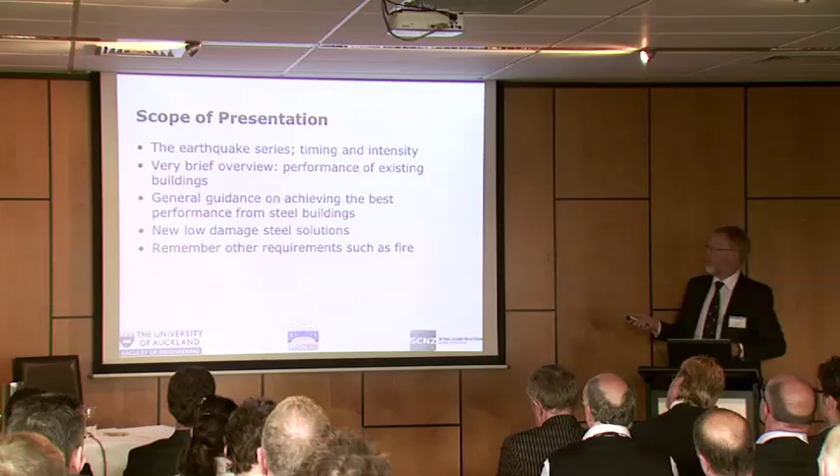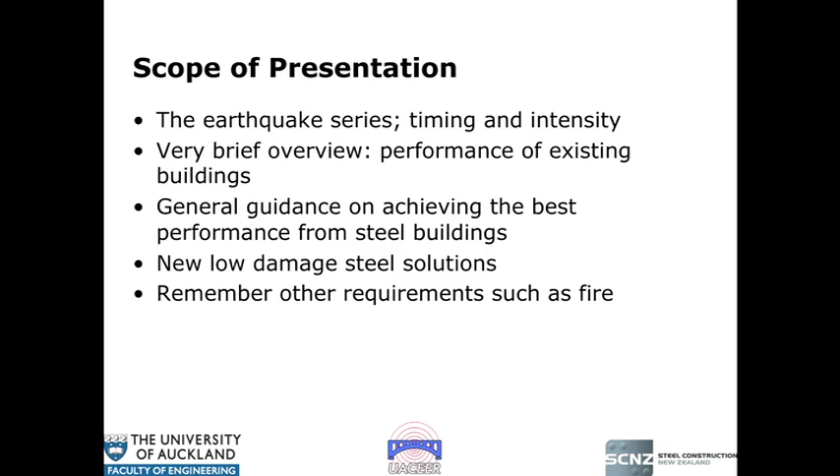So what I'm going to do now is talk about the performance of steel buildings in Christchurch. This will be a very brief overview: how severe the earthquakes were, performance of existing buildings, general guidance on achieving the best performance from steel buildings. This is really for the consultants and the contractors. Some of the work on the new low damage steel solutions, and then just a reminder that when we are talking about new buildings, not to forget that there are 35 areas of the building code which require good performance, and earthquake is only one of them.

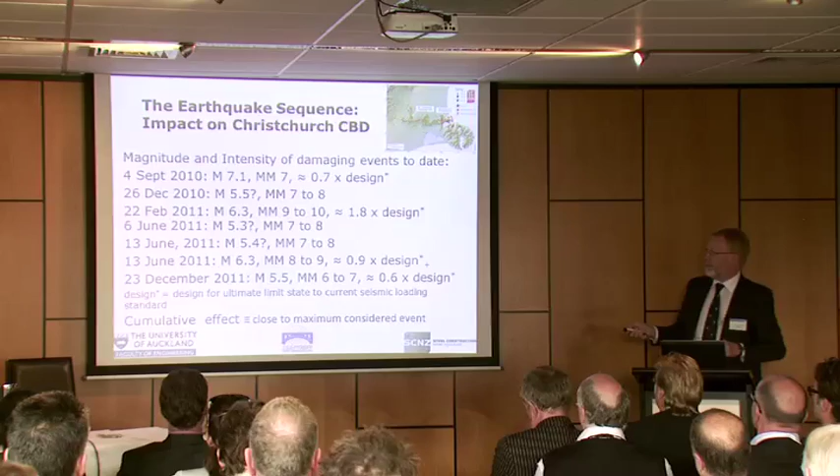Okay, so I've got a lot of pictures and words here, but I'm not going to go over all of them. I just want to reinforce the point that the Minister made: this has been an earthquake series unprecedented for hitting a modern first-world city. The design is what we call a big one, the sort of earthquake everyone feared would hit Wellington first. Well, Christchurch has been hit by basically 7 damaging earthquakes, varying from 0.7 times design up to 1.8 to 2.5 times design. So this has been an unprecedentedly severe earthquake series.

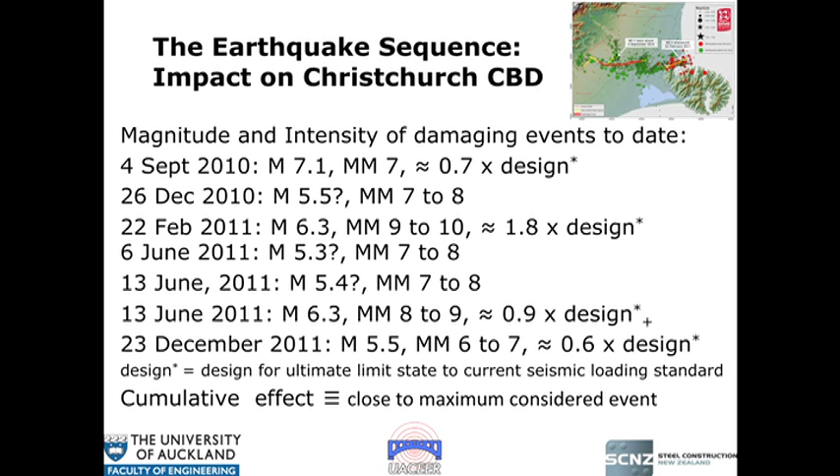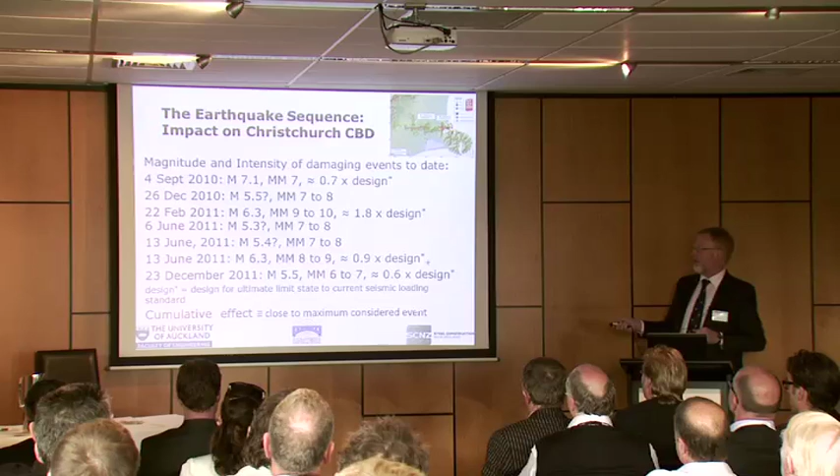Last February, the comment was made when we were looking at how steel buildings had performed that part of it was the short, very intense duration, but over time all the other earthquakes have put the duration component in. So we now have an earthquake series that has actually been close to what we call a maximum considered event. And if anybody had told me before September that Christchurch was going to be hit by a maximum considered event earthquake, I wouldn't have believed them.

What are we expecting of our modern buildings under that level of intensity and duration? The answer is that they shall remain standing under the design level event - that's a building code requirement. They should remain standing under the maximum considered event - it's so severe that it's a 'should' rather than a 'shall'. You're going to get damage and you almost certainly will require replacement. So that's the threshold criteria that the building stock in Christchurch has been judged against.

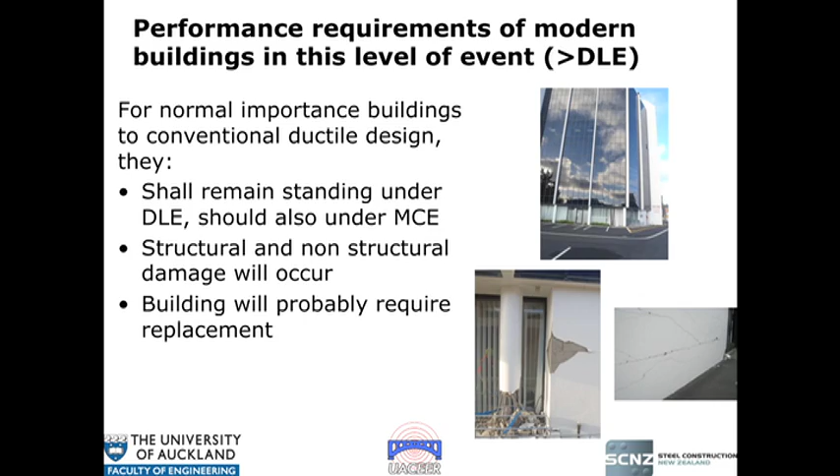This is BDO Spicer House, and you can see the sort of damage that it suffered, which is pretty consistent. Buildings on the whole, as the Minister has said, performed very well. They remained standing, they got people out, but the issue was the damage threshold and what do you do for repair or replacement. So if we now go and look at the performance of steel frame buildings in Christchurch...

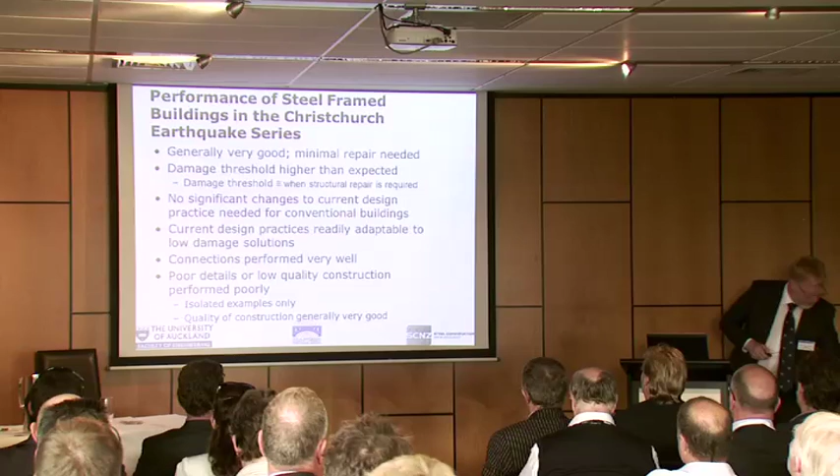Generally they have performed very well, and that's extremely pleasing. One of the most pleasing things is that the damage threshold has been a lot higher than we expected, and that's the threshold at which structural repair is required. As a result, there have been no significant changes required to current design practice for conventional buildings, and the current design provisions are readily adaptable to low damage solutions. In other words, we're surviving the big one with negligible structural repair, so you can go straight back in and reuse it - that is the stated aim of the design.

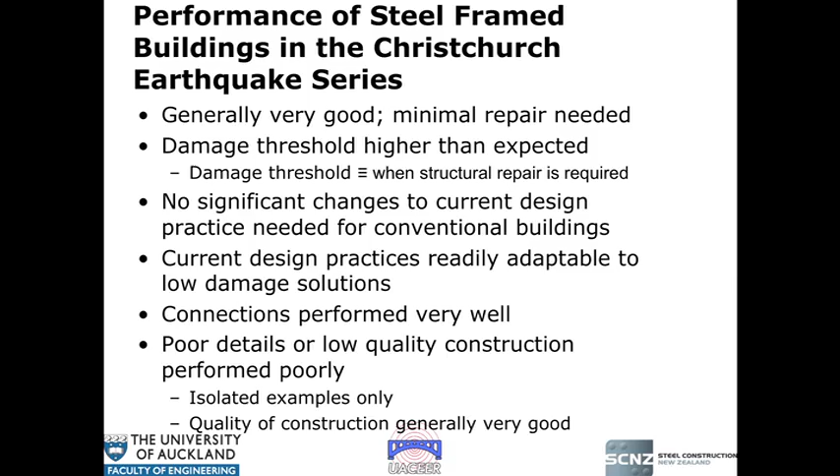Connections have performed very well, and connections have always been an area of interest, especially for the steel industry following the 1994 Northridge earthquake, when the standard connections used in American moment frames failed in their hundreds. So connections have always been known as a point of vulnerability. We thought we had it right, and this earthquake has shown that we do have it right.

Poor details and low quality construction performed poorly, which is expected given the intensity of the earthquake, but it showed that steel isn't a miracle material. Build it badly or have poor details and it doesn't perform well. But the earthquakes also showed that the quality of construction generally has been very good.

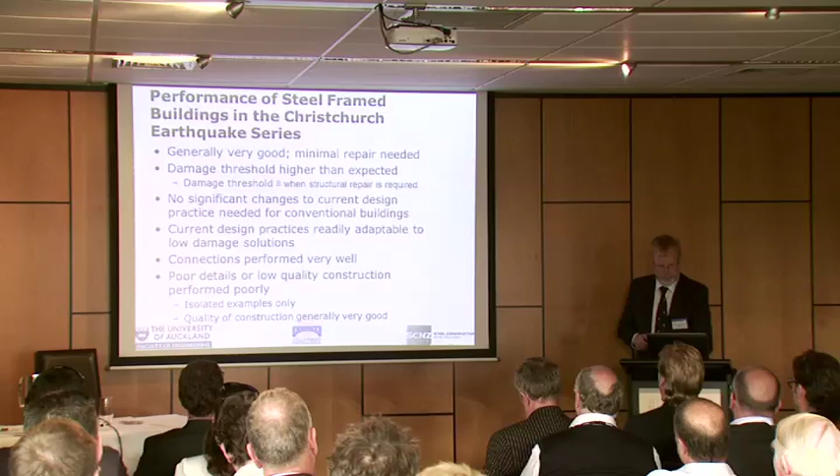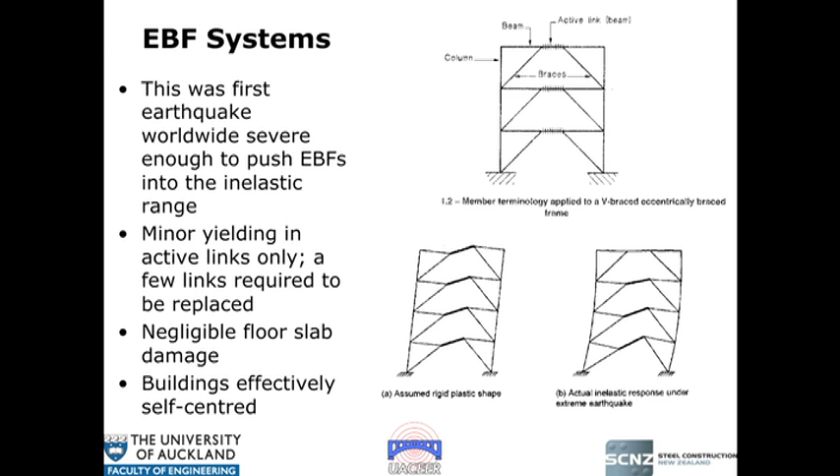A little bit on eccentrically braced frames. These are now a bit like liquefaction and duration and ductility, they've sort of become much more of a commonly known term. These are systems designed so that during a severe earthquake they respond with active links, which are fuses. Before the earthquake, they were strongly promoted in New Zealand as a very good solution for buildings. They deliver good strength, good stiffness and good ductility.

But the issue from a repair perspective after the earthquakes is that they were seen to have a low damage threshold. In other words, it wouldn't take an earthquake much over the design level to push them into the inelastic range, such that you'd have a major problem with what to do with these damaged links. What we found, in fact, is that the damage threshold has been much higher than we expected, and they've performed much better. Also, they have effectively self-centred, which means exactly what it states - they come back to their original position at the end of the shaking.

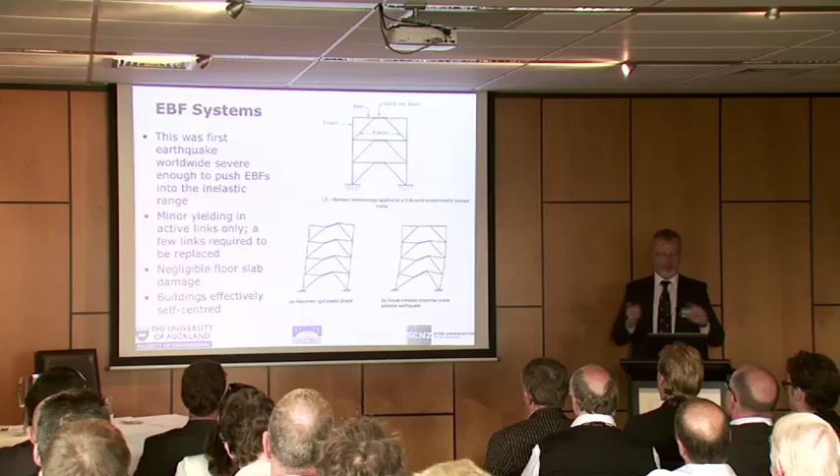So this is an example of a building just up the road. I had several other examples in, but to keep within the 20 minutes, I had to take them out. This is a 12-storey mixed EBF and MRF building, built in 2009, composite floors, torsionally irregular - that's engineering jargon.

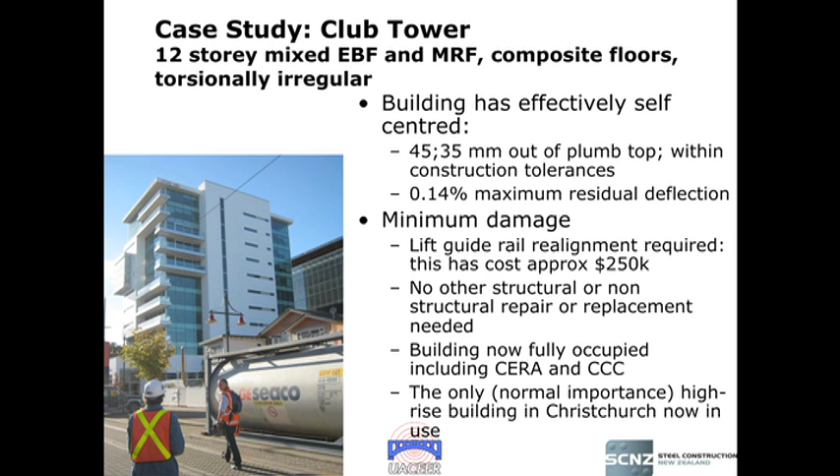The building has effectively self-centred. It's come back to within its construction tolerance envelope with minimum damage. Even then, there's been repair of lift rail guides and things that haven't been negligible in cost. But the building is now fully occupied, including CERA and the City Council. And it's the only, as I understand, the only normal importance high-rise building in Christchurch now in use.

The other high-rise building in use was the police station, but I also understand that that is finally going to be abandoned. That's some of the damage.

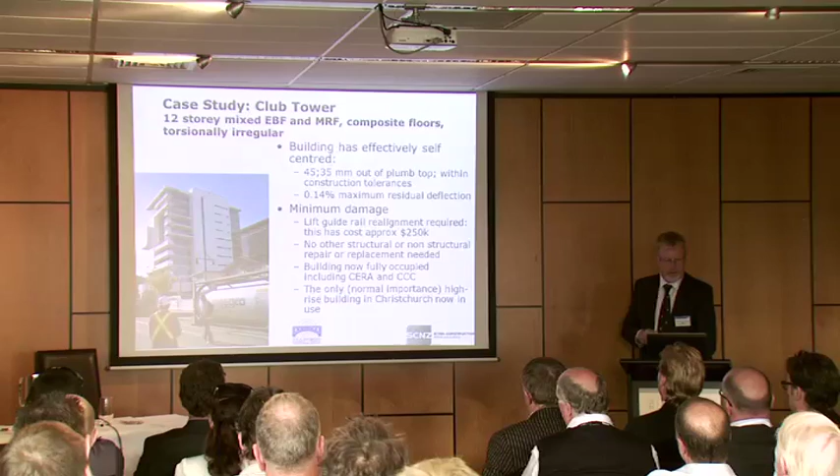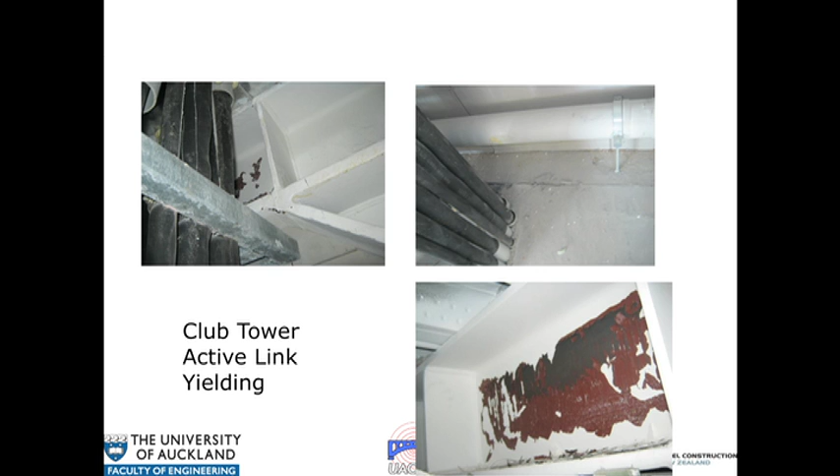Here's the active link. This thing's done what it's supposed to do, but the extent of yielding has been such that the steel has been able to be left in place. This is looking down on the floor slab above - minimal damage. So all of this has been such that the damage is minimal and the building can continue to be reused.

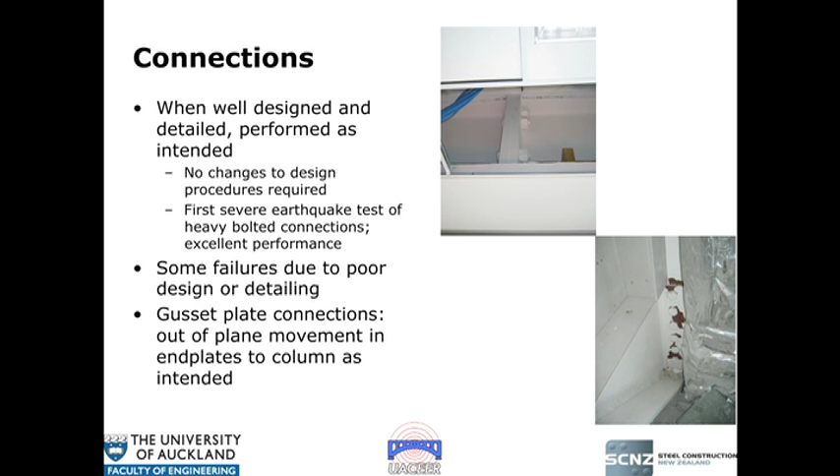Our connection design provisions, on a worldwide scale, are quite conservative. In fact, our whole capacity design, our whole seismic design procedure, is quite conservative. There has been some thought over the years of whether it's a bit too conservative, but I think the answer to that has been shown - no, it's not.

Even Roger Sutton, the head of CERA, when I went to the opening of the HSBC tower and explained to him the severity of the earthquake, said, 'Oh, the building must have been over-designed,' which is probably true in terms of its building code performance, but that was a good thing.

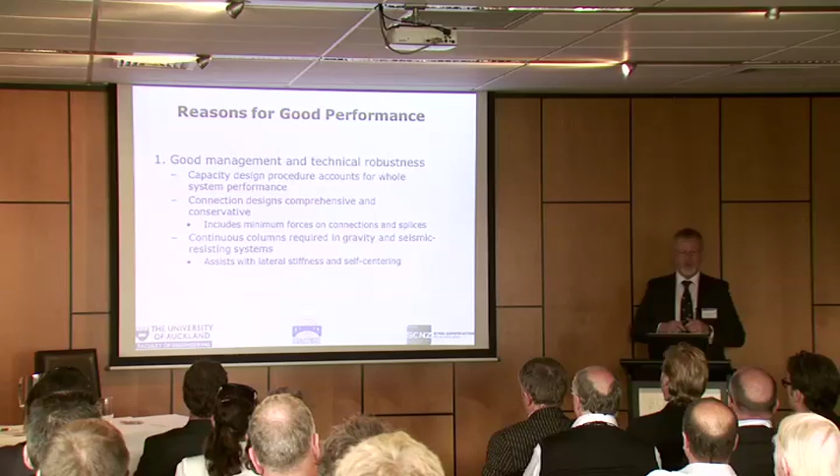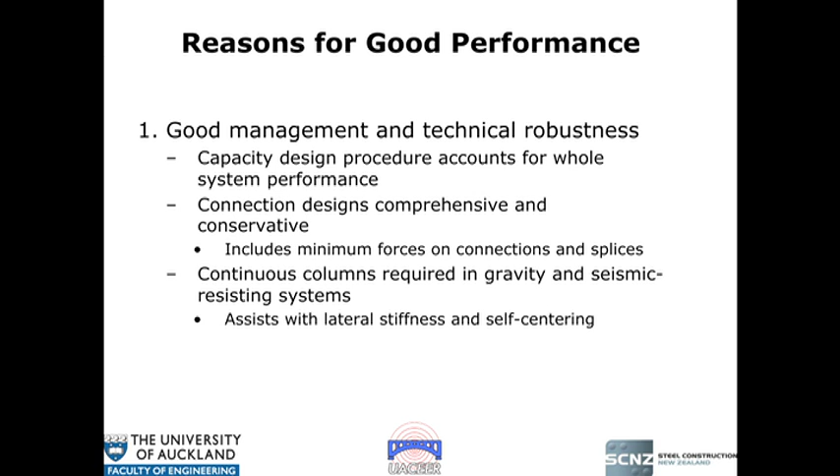So the reasons for the good performance: basically good management and technical robustness. I won't go into all the jargon on this, but basically the design procedures have worked well, the connections have worked well, and the whole building has performed better than the sum of its parts.

The second one is the properties and quality of steel.

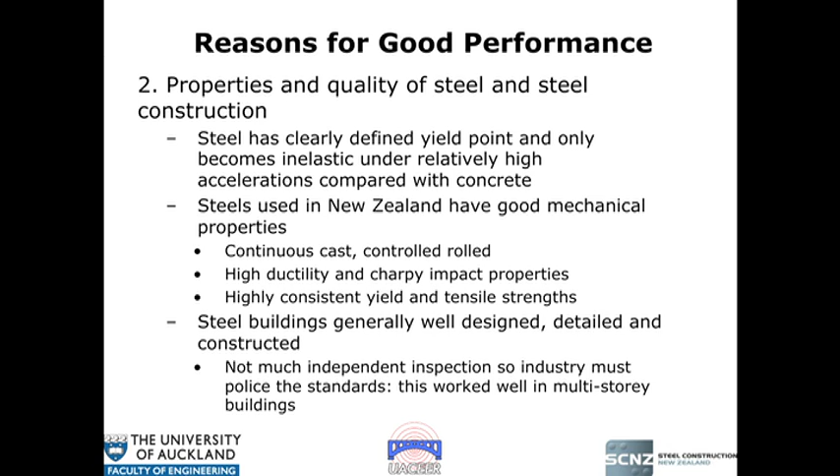One thing about steel, it has a clearly defined yield point, so it remains elastic up to a point and then becomes inelastic, which only happens under relatively high accelerations, compared with concrete, which starts to crack at relatively low levels of load, and then the cracking and softening builds up as the intensity increases.

So that's been an advantage. Also, we have good steels in general, and the buildings have been generally well designed, detailed and constructed. The building control system inspection regime at the moment is such that there's very little independent inspection of prefabricated componentry in any material.

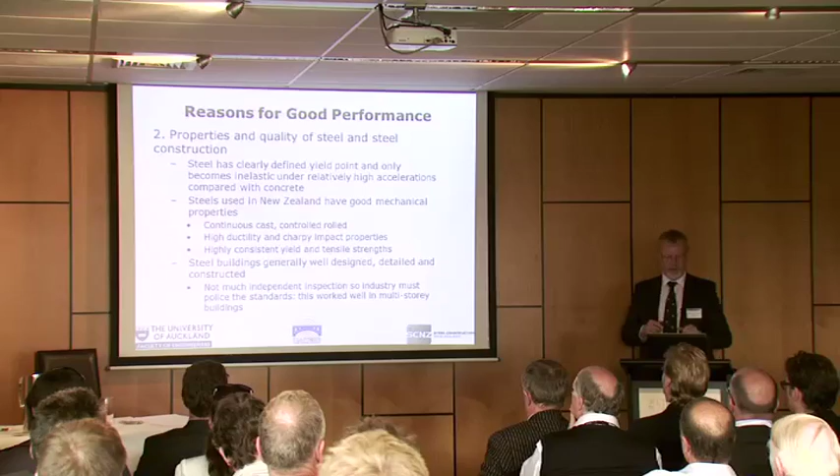So the industry really has to police its own standards, and on the whole that worked well. The third one is these composite floors, which I'll talk about next. They have performed exceptionally well. This has been a landmark event showing how robust composite floors are in earthquakes. And the fourth one is simply good luck.

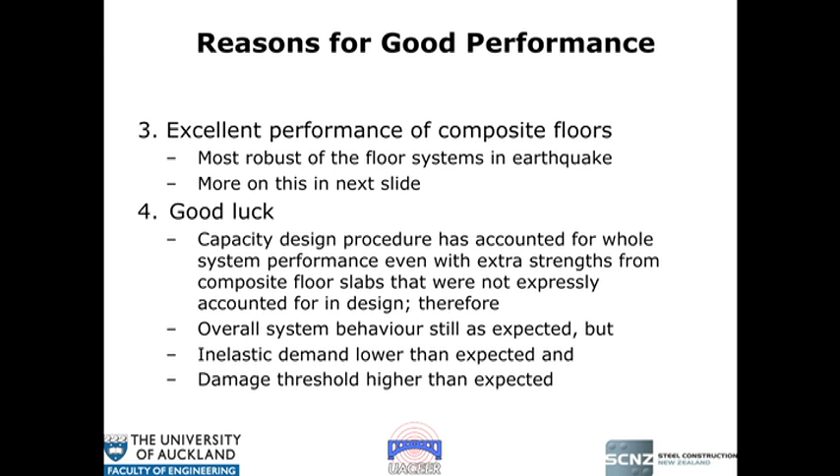We have a design procedure that says, for instance, an EBF's damage is going to concentrate in these components, and the design then suppresses damage in other parts of the building. However, the buildings have all been stiffer and stronger than we expected, because whole building performance has kicked in and made the building stronger than expected. But that hasn't caused yielding in other than the designated components. So there's an element of luck in there.

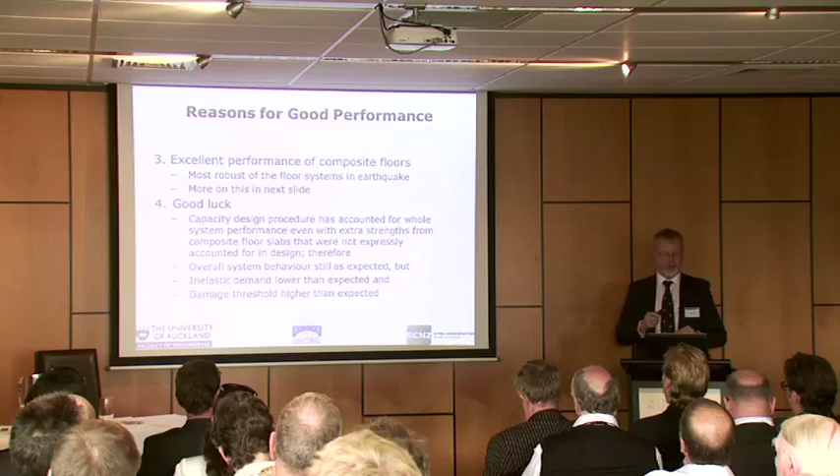The overall system behaviour has done what we expected it to do, even though the buildings were stiffer and stronger and the damage threshold was higher than expected. And there is an element of luck in there.

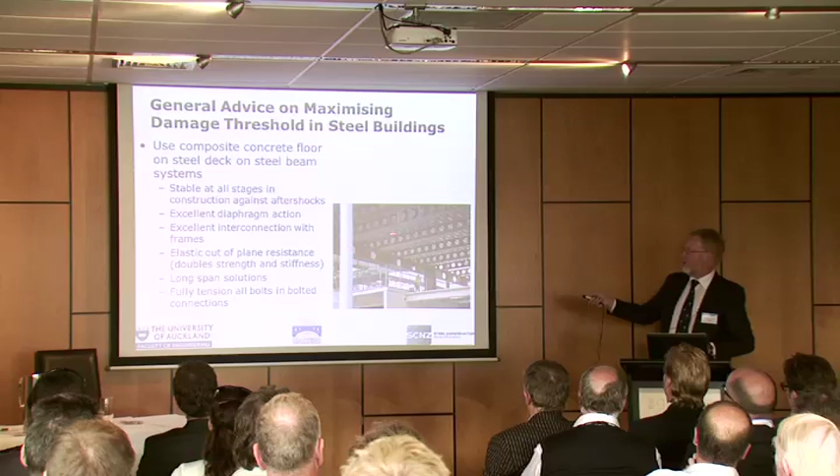Composite floors, these things are composite floors. This is basically in situ concrete on tin deck or light steel deck on a network of secondary and primary steel beams, a standard procedure well suited to steel frames. We did not really know until this earthquake series how good it would be in earthquakes.

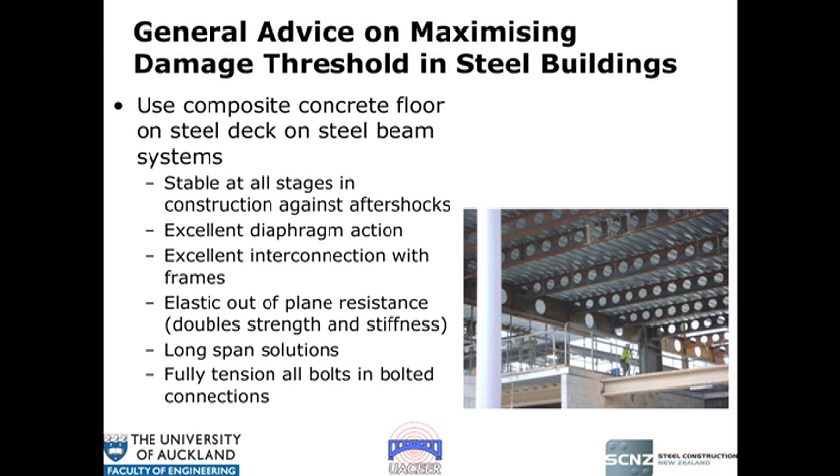Its performance has been superb. It's stable at all stages of construction against aftershocks, so this is just a point on new buildings. Excellent diaphragm action in terms of its role of holding all the building together. Excellent interconnection with all the frames.

It's got very high elastic out-of-plane resistance, so when the building sways and the floor slab tries to move up and down, it resists that elastically, bounces back again, and it ends up flat at the end of the earthquake. So if the floor slabs end up flat, the supporting elements end up vertical and the building self-centres.

I'll come on to this last bit in another slide shortly. So the next thing is some general advice on maximising the damage threshold, in other words, making the buildings as resilient against damage as they can be. The first one was the composite floors.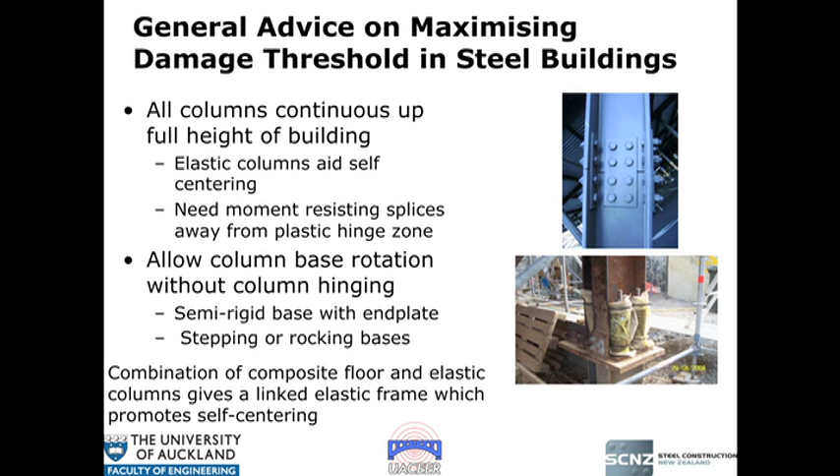The second one is running these columns continuous up the height of the building, so you've got a set of elastic columns. Before the earthquake, they started off vertical. They remain elastic, so when the shaking stops, they want to end up vertical again, and they help bring the building back that way. Also allowing some column base rotation without hinging at the base of the column.

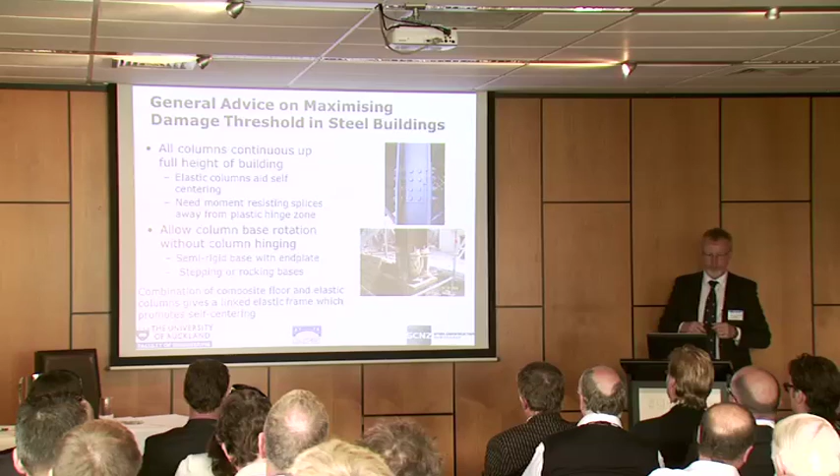And there are some solutions. This is from a landmark building in Wellington that may be talked about a bit more later on today. So you want to allow some hinging at the base, rotation at the base without damaging the columns. This is to raise your damage threshold.

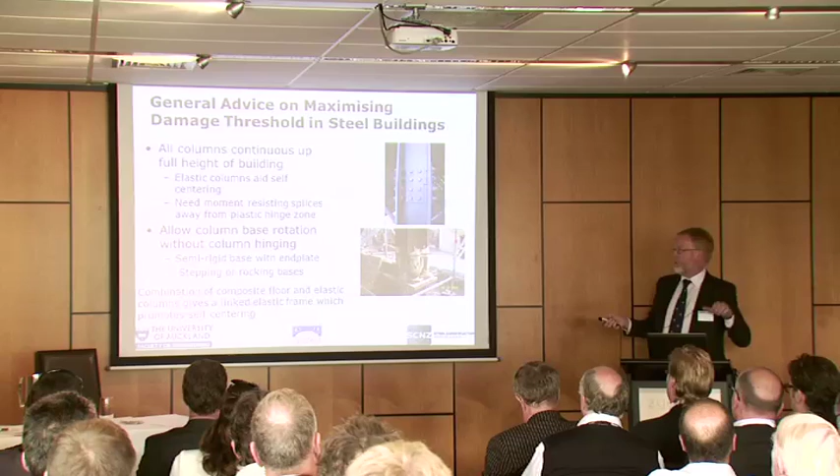The combination of the composite floor and the elastic columns gives what's called a linked elastic frame, which strongly promotes the self-centering that we've seen. The other option, in conventional buildings, is simply to lower what's called the ductility, the structural ductility factor. If you limit the structural ductility factor, typically buildings have behaved over 2 times stiffer and stronger than the model state. We've seen that in Christchurch in real buildings.

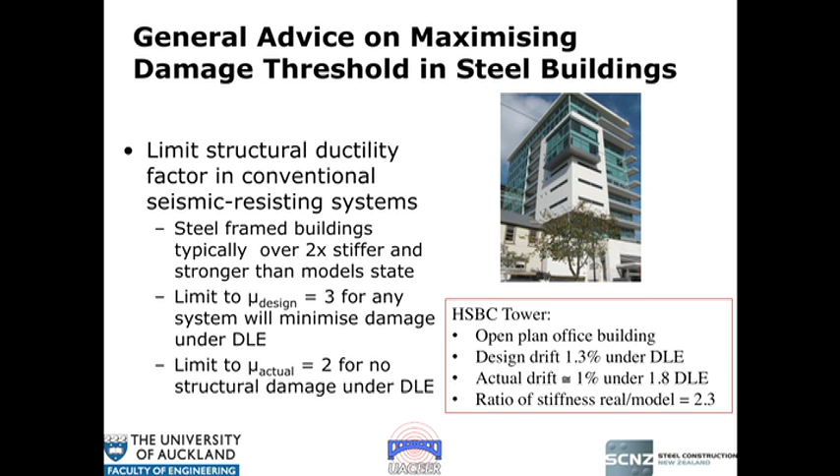I've just had a student finish a project where we've seen that numerically as well, so the numerical modelling and the real building performances are very consistent. Buildings are typically a minimum of 2 and up to 3 times stronger and stiffer than the model state. So if we limit the structural ductility factor to no more than 3, or even 2, we will not have structural damage under the design level event.

This is for conventional systems which are not designed as low damage. HSBC Tower, for example, was not designed as a low damage building. It won, the steel solution won in a competitive commercial environment against about 14 different options. So there was nothing special about that building, and yet its performance was special. As an example, the ratio of the stiffness of the real building to the model was a factor of 2.3.

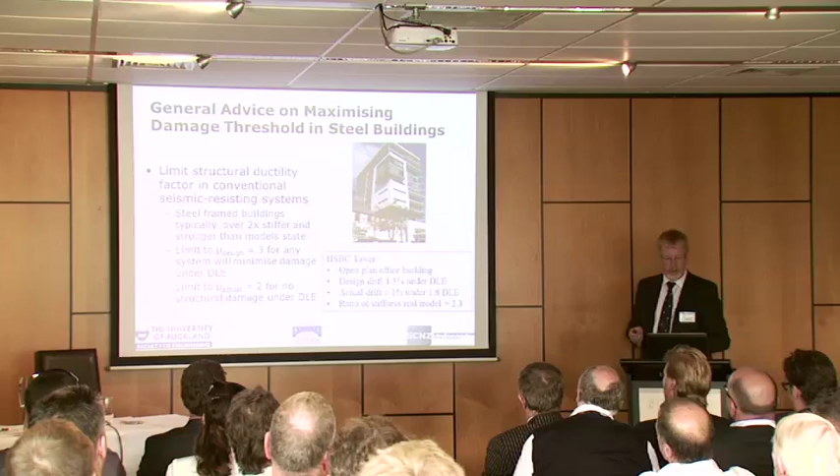Now coming on to some of the low damage steel solutions, we have an active development program going on. The objective is no structural repair required after the ultimate limit state design earthquake, minimal required under the maximum considered, and if you do have to do any repairs, they can be undertaken easily with the building in service. You're not looking at pulling out large components.

You might replace a bolt or a piece of steel here or there. So one of the first solutions is the conventional systems, just with a relatively low structural ductility factor. We know that works, it's been well proven.

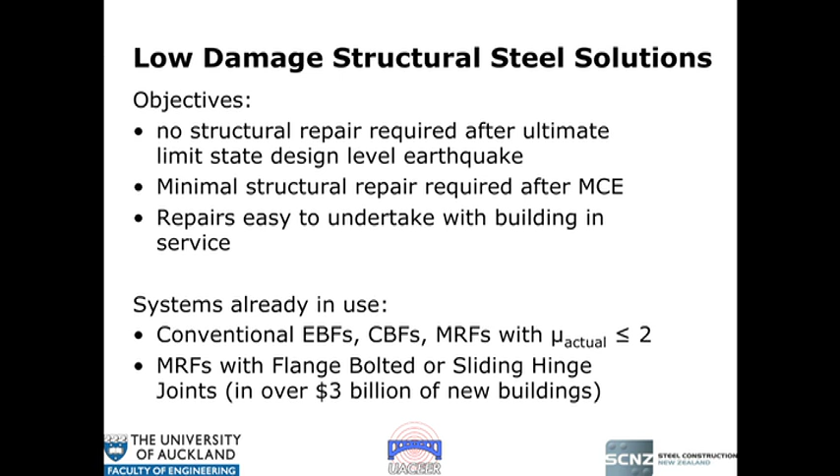The second one is to go a bit fancier, which is these moment-resisting frames with flange-bolted or sliding hinge joints. This was a system I developed for my PhD, 1998 to 2005 - bit of a slow learner, but I was working part-time. That's now on over $3 billion of new buildings in New Zealand.

So I'll just briefly do a little presentation of these.

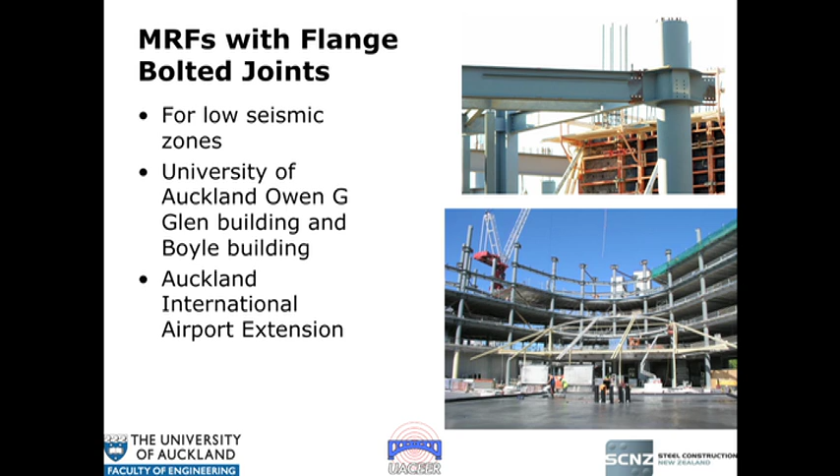Flange bolted joints - that's this system here - designed for controlled stretching and squashing of plates in a severe earthquake. They're basically designed for low seismic zones like Auckland. This is the Owen Glen building at the University of Auckland, and they have been quite widely used. They seem to work very well, the contractors like them.

In the higher seismic zones, which is Wellington and now Christchurch, we want something that actually has a bit more give than that - its damage threshold is higher. During the earthquake, the columns can rotate back and forth relative to the beams without pushing steel elements to the point where they will need replacing.

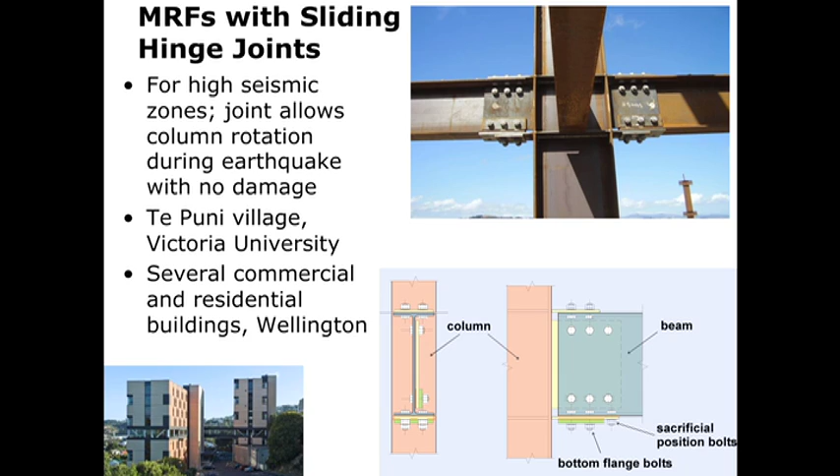So the idea with this is it allows what's called column rotation during the earthquake with no damage. It's pinned at the top and it slides at the bottom.

That's been used on several commercial and residential buildings in Wellington, including a landmark series designed and built by Oricon for Victoria University of Wellington. These buildings won a 2009 Institute of Structural Engineering International Award for the best engineering design for buildings in the healthcare and education service.

The idea is that during the earthquake, as the ground moves, these columns can rotate. It slides in a controlled manner on this point, and it's pinned at this level, so it doesn't affect the floor slab.

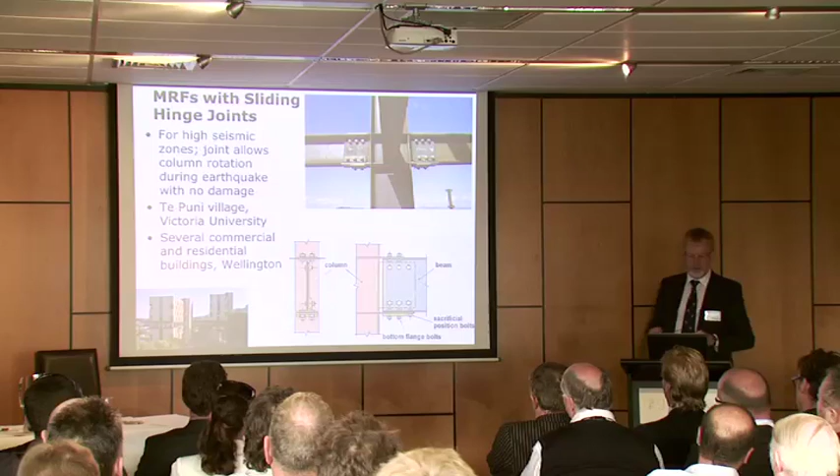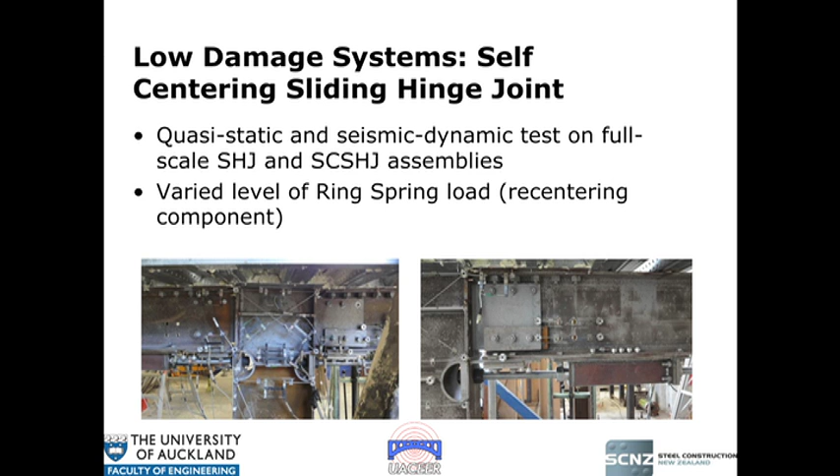That work's been taken further to develop a solution that actually returns back to centre after the earthquake with its full strength and stiffness - this is what's called the self-centering sliding hinge joint. This is a full-scale specimen, actually a design from level 7 of that Te Puni Village building I showed you earlier, with a component that basically pushes and pulls the joint back to vertical.

If I click here - this is a large-scale test that we did. I haven't got the sound on, but this is an example of a typical column, here's your beam. This is pushing the column back and forth to simulate the earthquake, and you'll see as the deformations get larger that the column is rotating. You can see the floor slab just start to develop a slight curvature as it goes back and forth.

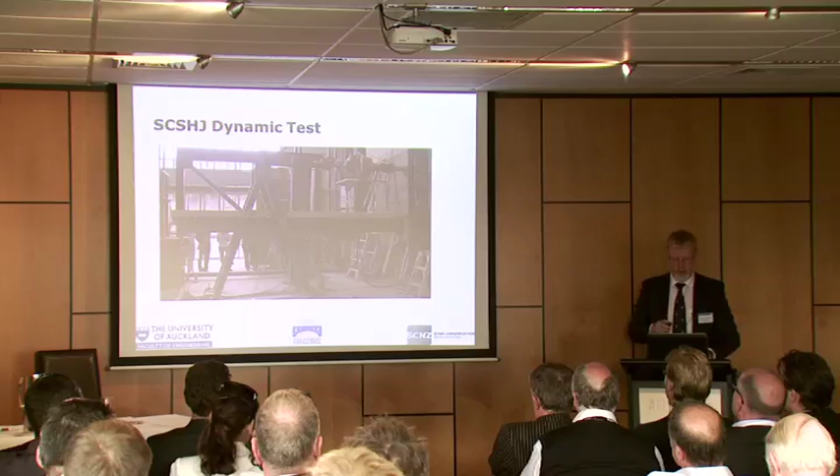That worked extremely well - it went through over 100 cycles of inelastic loading. That's the moment rotation curve, and engineers will know that for promoting self-centering, you want nice fat energy absorption in these two quadrants and basically nothing out here, and that promotes the building self-centering.

This is the slab around the column after 4 cycles at greater than 2% drift, which is about the limit of what you would have got from Christchurch.

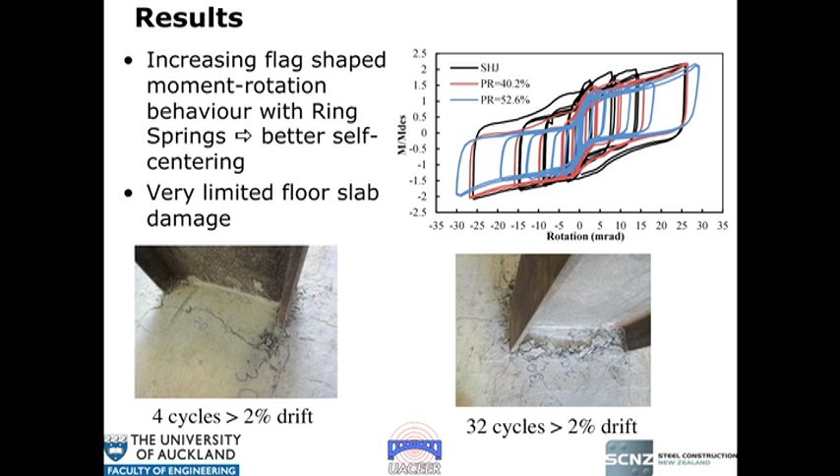And this is 32 cycles at 2% drift, so the damage is not that much greater. So these systems definitely work.

Some other examples now that are being recommended. This is the old eccentrically braced frame with the active link. Traditionally this has been a continuous member, so it means you have the issue of having to cut it out and replace it if it's strained to the point where it can't be left in place.

The recommendation now for all new designs is to use a bolted-in active link. The technology and design procedures for that are available now, and SCNZ are developing design examples, so there's nothing new required in that.

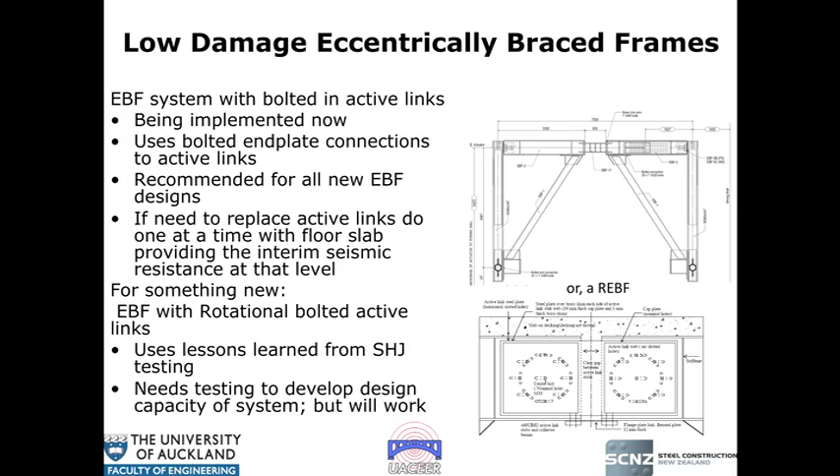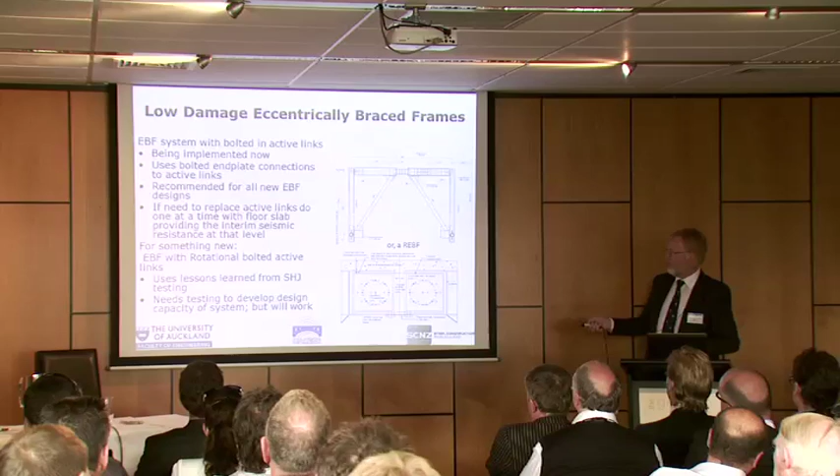If you need to replace the active link, you just do so one at a time. The floor slab will hold the building in place while you do that, and you just unbolt them and put a new one in. This is another example we could look at, with rotational plates and sliding bolts, but that does need some research work done.

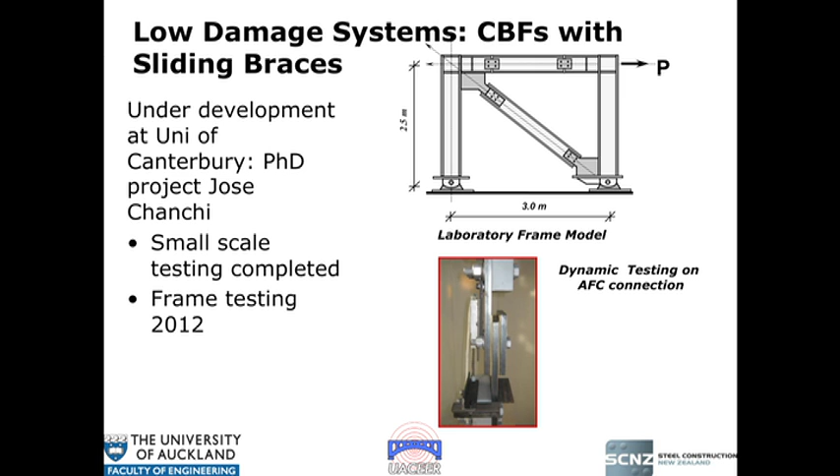The sliding system is also being used on frames. This is an example from University of Canterbury. Small-scale testing has been completed by Jose Chanchi, and a large-scale frame test is due in 2012.

What's this here? Okay, and this is one that we've done. These are buckling restrained braces, stiff and strong. This is a brace designed to have equal strength and stiffness in compression as it is in tension. They're used overseas, but based on patented systems overseas.

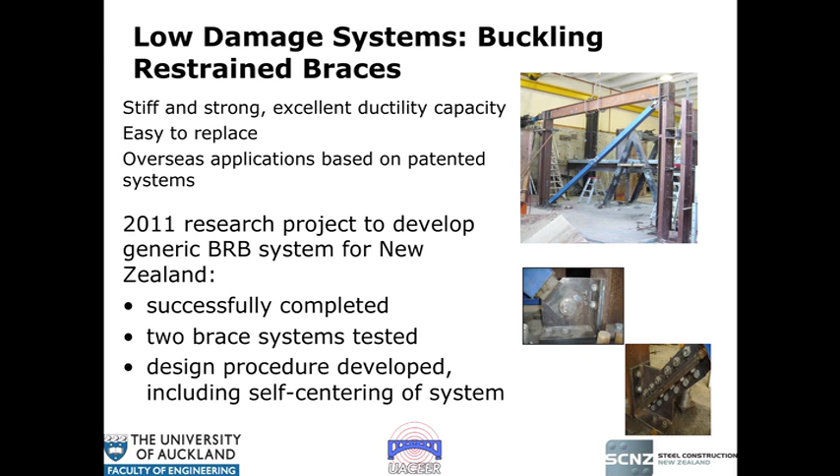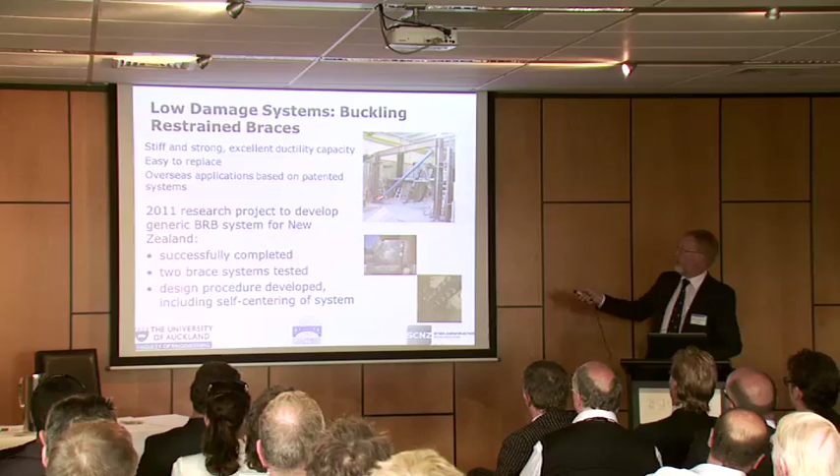So I had a Master of Engineering student design and build a generic system using basically homemade componentry that we can get. Two brace systems have been developed, and a design procedure has been developed including issues such as maximising the self-centering capability of these.

And with a little bit of luck, this one has not worked very well so far, but this should, I hope, show a test. Yes.

Okay, and this is the last thing I want to note on. When you are designing new building systems for Christchurch or for anywhere, don't forget other NZBC requirements.

We are now looking at going into, for example, multi-storey timber frame buildings, pushing them into the commercial area, and I'm actually involved in some work in that as well. But one of the big issues is fire in multi-storey buildings.

When you go into commercial and retail buildings, if you get a fully developed fire—in other words, if the fire reaches its maximum severity—statistically it's likely to involve at least one full floor.

Some of the building systems, in fact everything other than steel—its whole building performance in fire is quite different to that of the elements in the standard fire test, and some of the building systems can be quite vulnerable. I have real concerns, for example, over multi-storey timber buildings and fire.

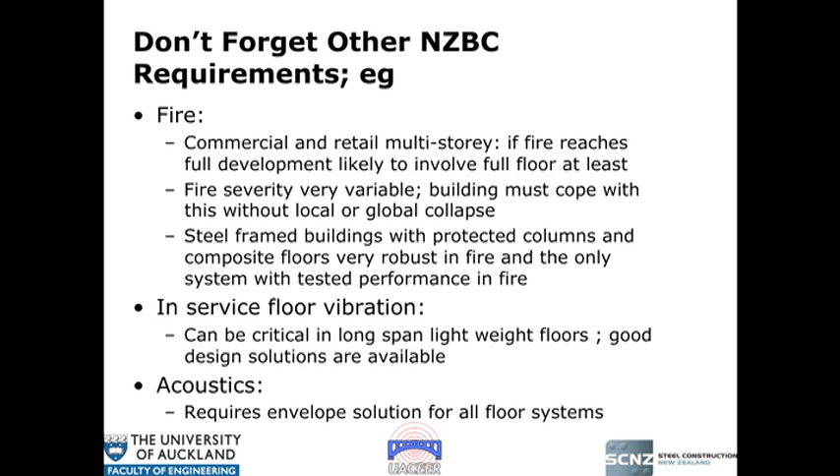Steel frame buildings with protected columns and composite floors we know are very robust in fire. They've been well tested in a landmark full-scale building test series done in the 1990s and 2000s, and it's the only system with tested performance under severe fire.

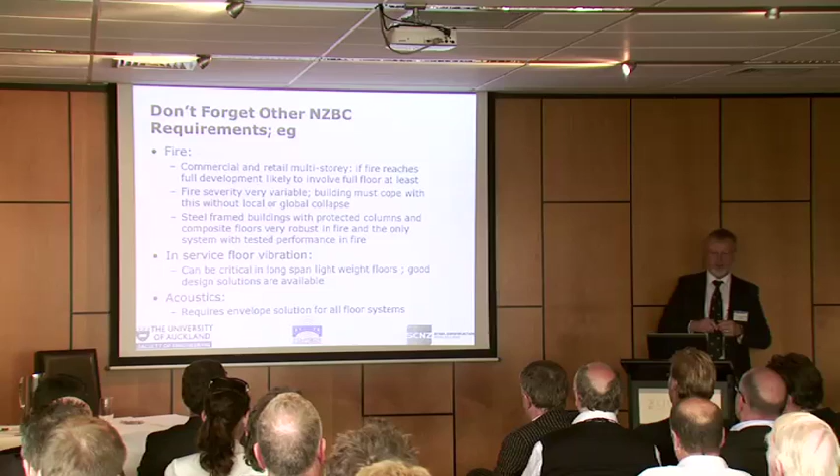Some of the other issues are vibration in lightweight long-span floors, and acoustics. The building code acoustic provisions are set to be made considerably tighter, which they should be, which means you require an envelope solution—you can't just use a certain thickness of concrete and meet your acoustic requirements.

So just remember there are 35 performance areas in the building code. Earthquake is one of them. Your building solutions have got to deliver good performance in all of those areas, not just for earthquake. Okay, and that is it from me.